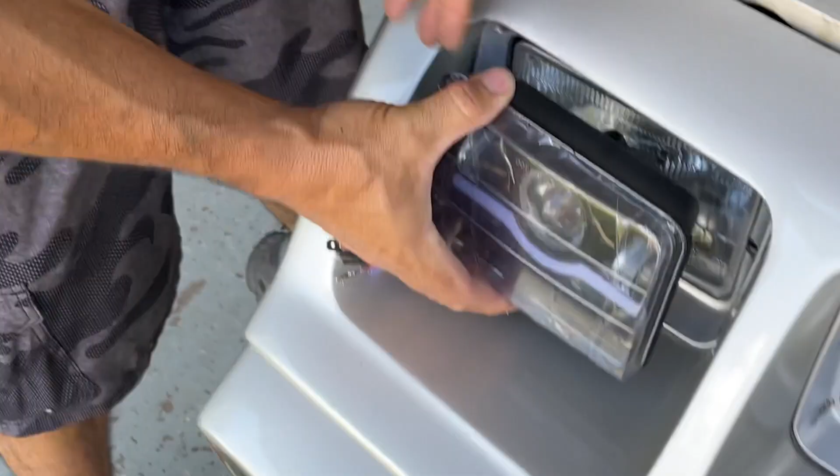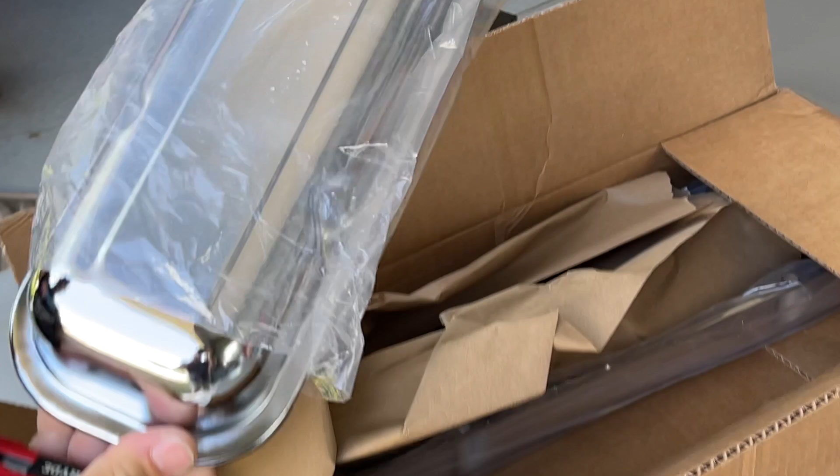What are these, Chris? Full LEDs with a running light and a blue accent. Valve covers. Were the lights on the list too? Yeah, nice. So these were center... center breather hole with center Pontiac bolt pattern.

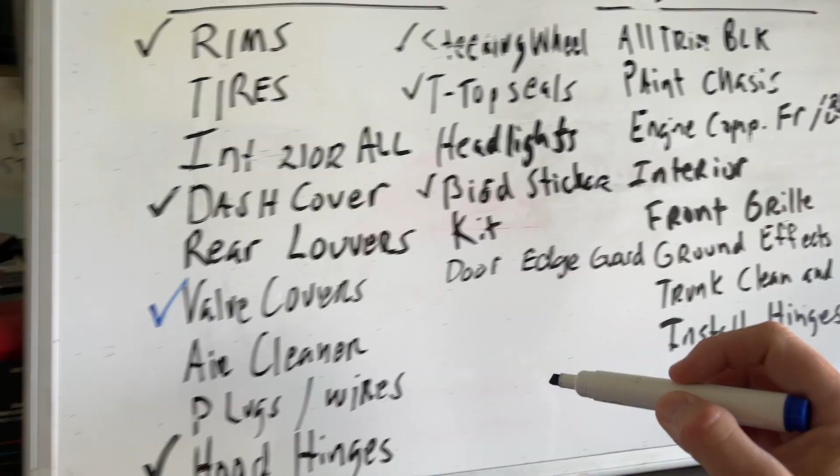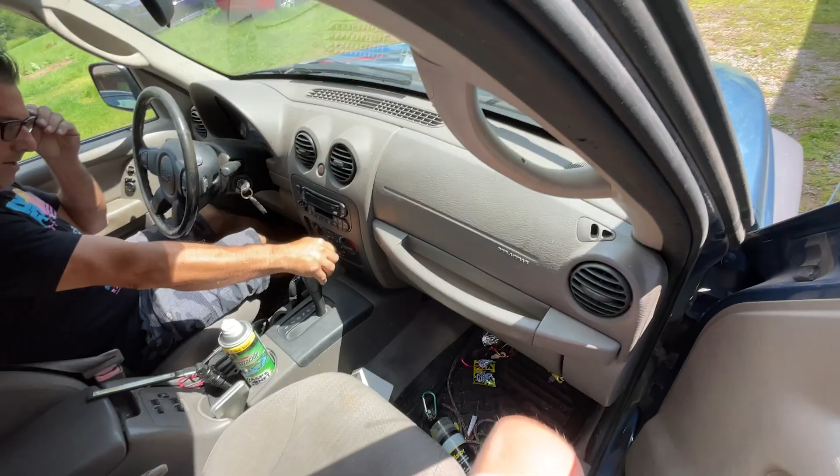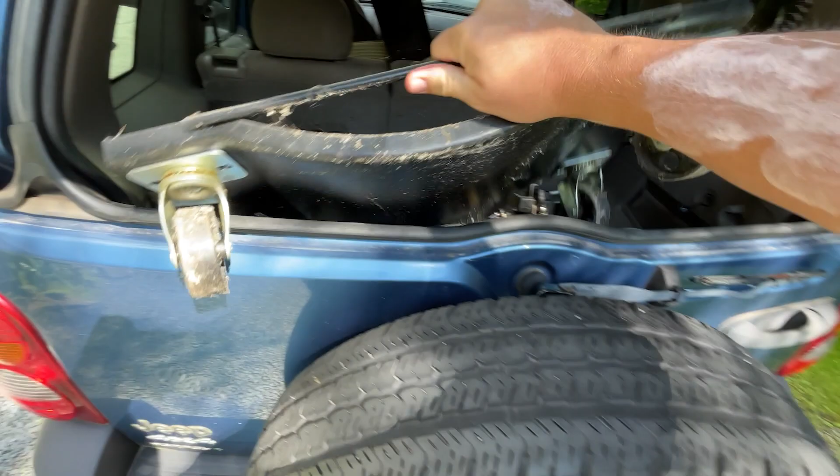When we were in Georgia, there was a lowrider Impala in front of us driving through town. It's hilarious, you knew where it was. It's underneath that, we got it. The other one we need is underneath a motor, so we have to get out of there.

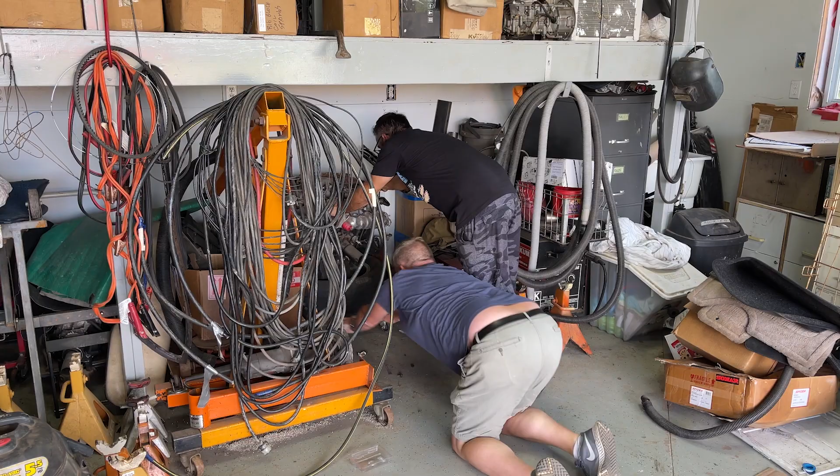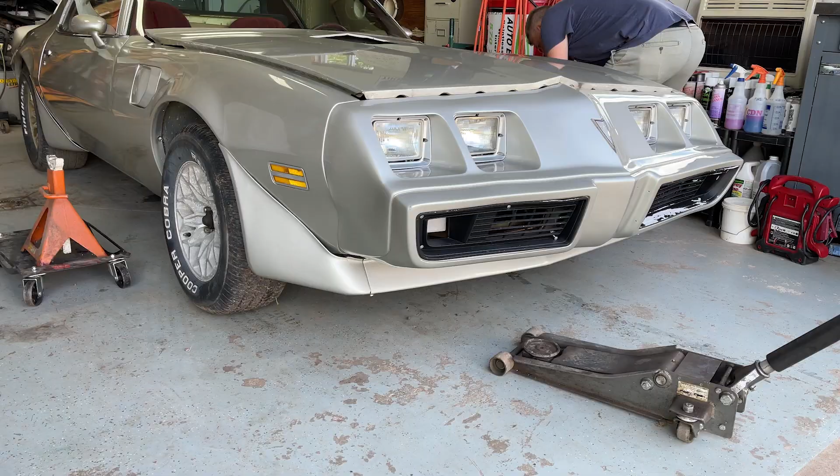They're made for going to the tires, but we can't have the tires in the way. We need to clean and paint inside the wheel wells.

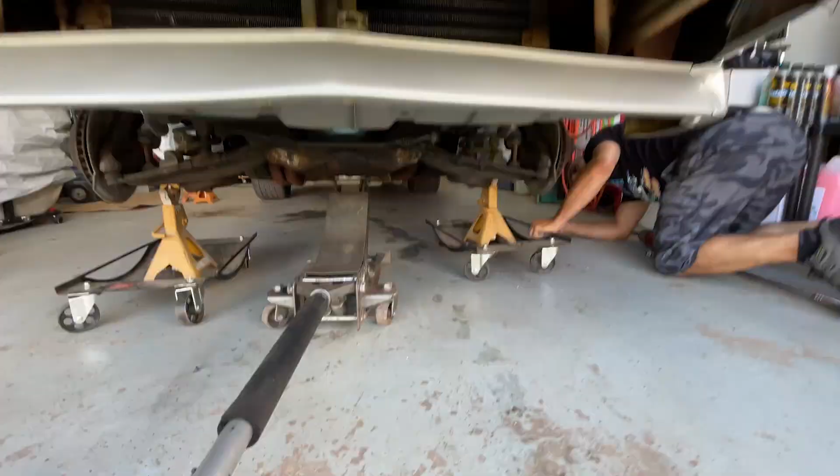One more, good. So I'm trying to keep them in that pocket. That way it makes it a little more steady. Open the door, yep.

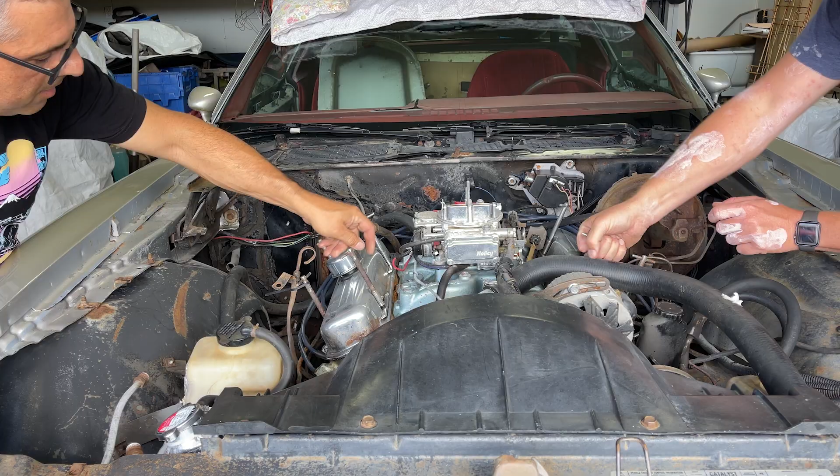I can see why they put something like this in here, though. I couldn't get any of mine to come out, so... this helps the valve cover seal better. Oh, you meant they didn't come with them. Yeah, it didn't come out. They're rotted.

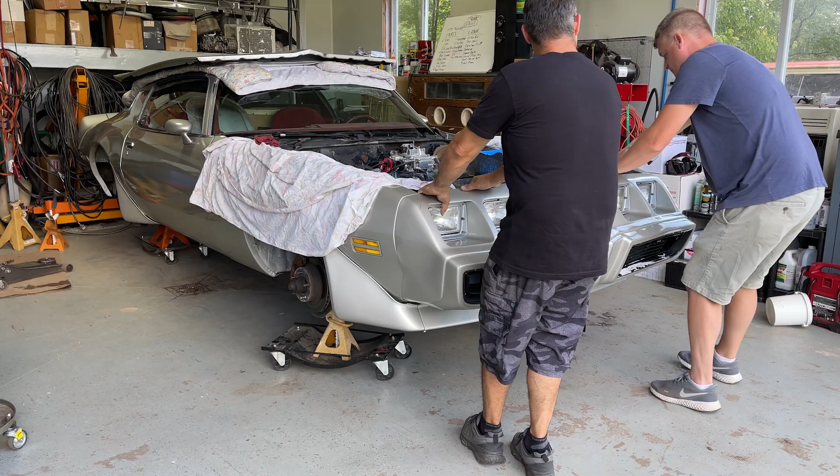Do this all the time.

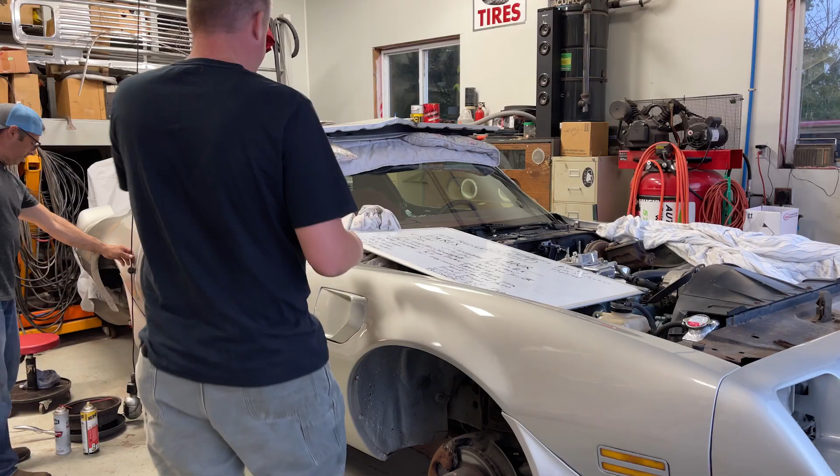Figure it out, Stan, hold this up. Or I'll hold this up. What? You could stand right in front of me if you want. Huh? Oh, right, I thought you were doing video. We're good. Right, we're professional YouTubers.

All right, here's a dry erase board list for the 79 Trans Am build. Now, like I said before in the first episode, we're just kind of making a cruiser, not necessarily low budget, but not super high budget either. So what we're gonna do is we're gonna do everything we can ourselves, and we're gonna make a nice running car that's definitely gonna be cool enough to drive to a car show or a Friday night cruise, something like that. We have our parts list, we have our labor list.

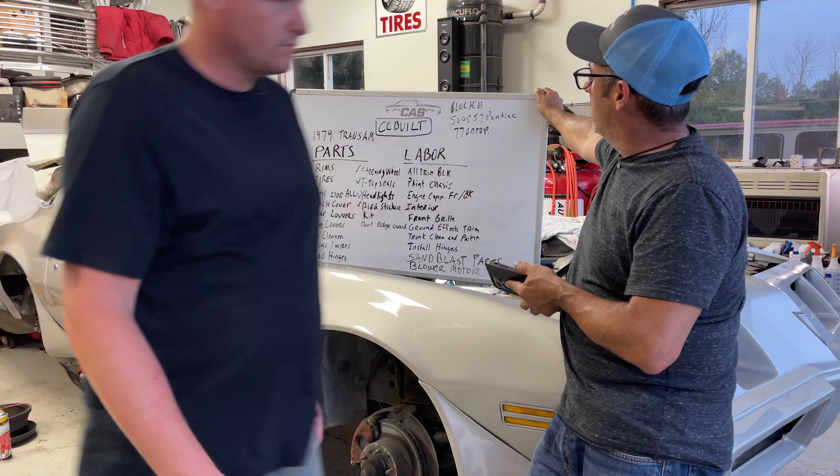They kind of go together, but I like to get a lot more parts ready to go before we necessarily do a lot of the labor. So we checked off a lot of the parts already on the parts list. We have the rims, we don't have the tires yet, but we don't really need the tires yet. A lot of the little stuff to do the engine compartment we have.

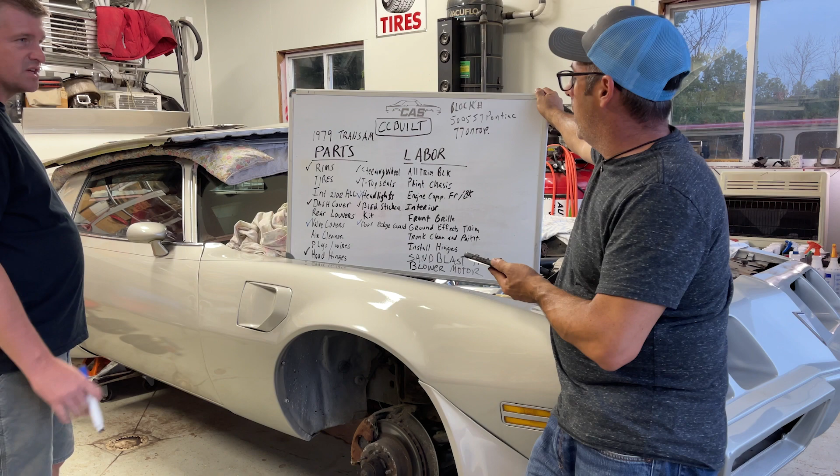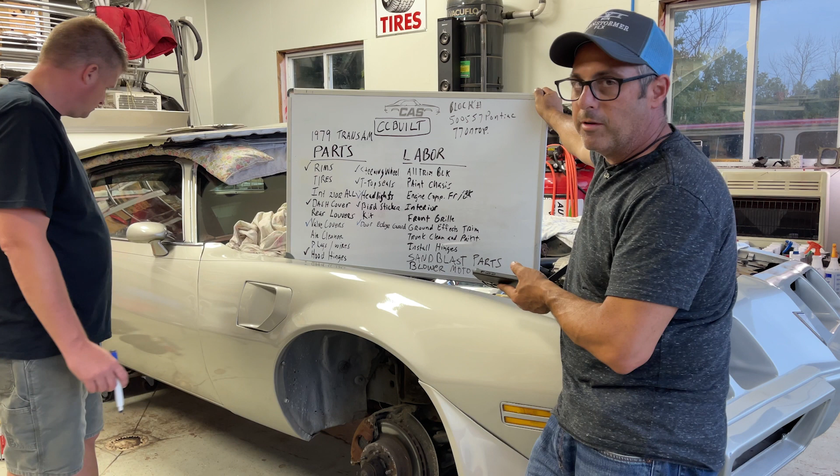We're gonna go for it, it's gonna have the Firebird stickers, it's gonna have all the... it's gonna look like the 79 Firebird, but those of you who know what Resto Mod is, it's gonna definitely be a Resto Mod look. It's gonna have a lower stance, little bigger wheels, still in the Firebird fashion. We have the 17-inch year one wheels, which look like the original Firebird wheels, but they're bigger. Lower profile tire, way more modern, better handling. The look is just incredible compared to what they used to look like.

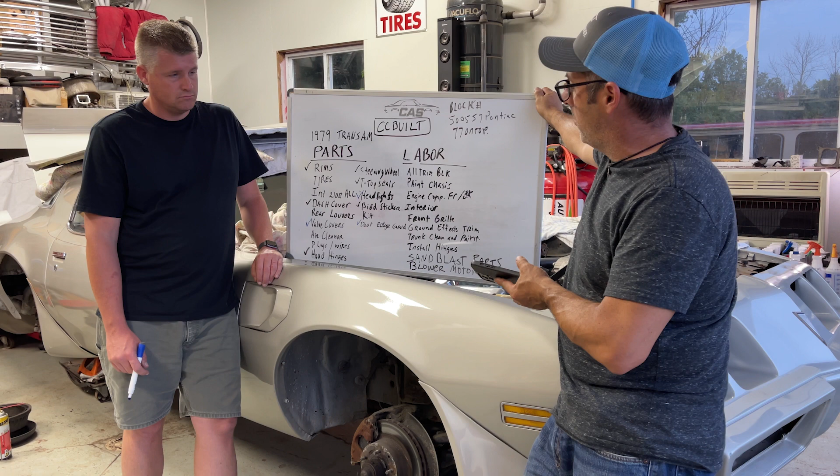It's gonna have the normal Firebird kit on it, but we're definitely gonna make it a one-off. It will be its own design. The rest of the graphics and the body will definitely be its own design. So you won't be parking next to one just like it at the show, because there won't ever be another one like it. You were taking apart all the brakes in the back.

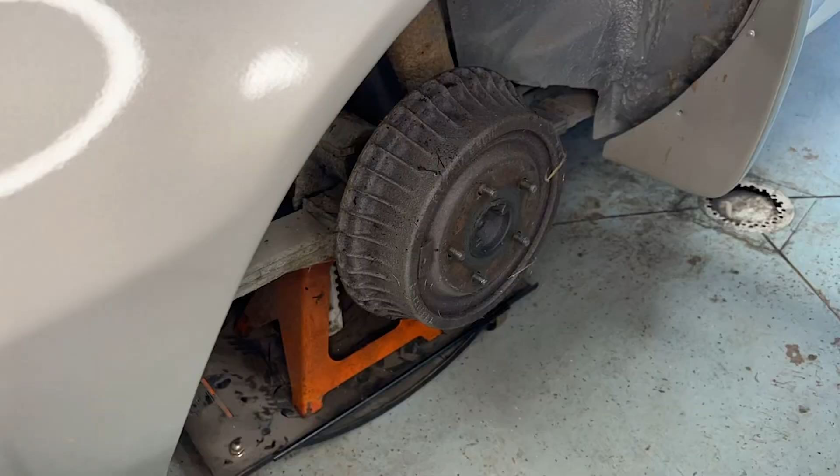Yeah, we have one side we have to rebuild, had a bad cylinder which let brake fluid into the rear drum, wet down everything. So clean all that up, get the new brake cylinder in there. Have new brake pads on the front, they're on already. So we'll just make sure the brakes are all good. That way, once we get it all sanded in the wheel wells, get the frame all touched up really nice, we can put the tires on, and we don't have to take it apart again.

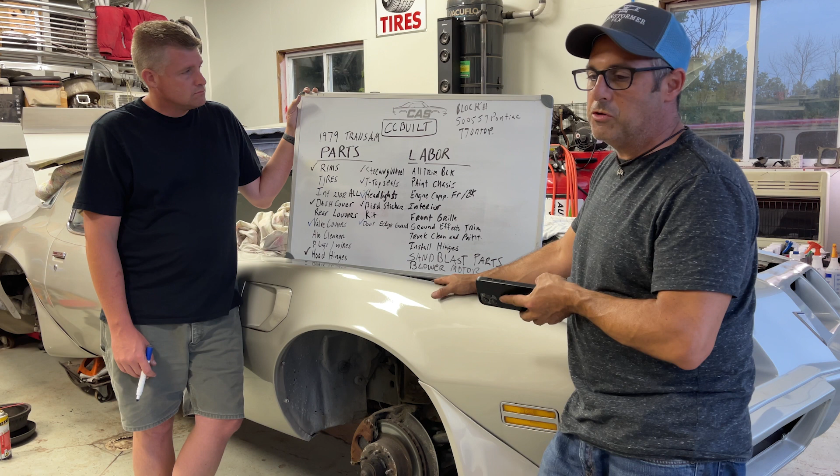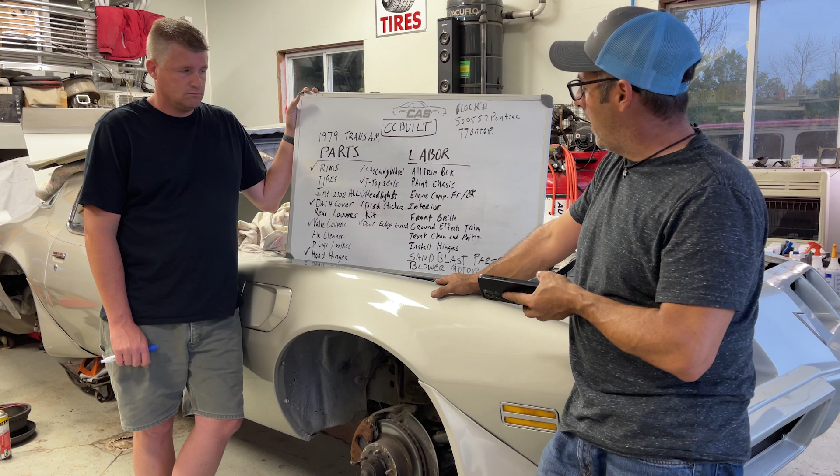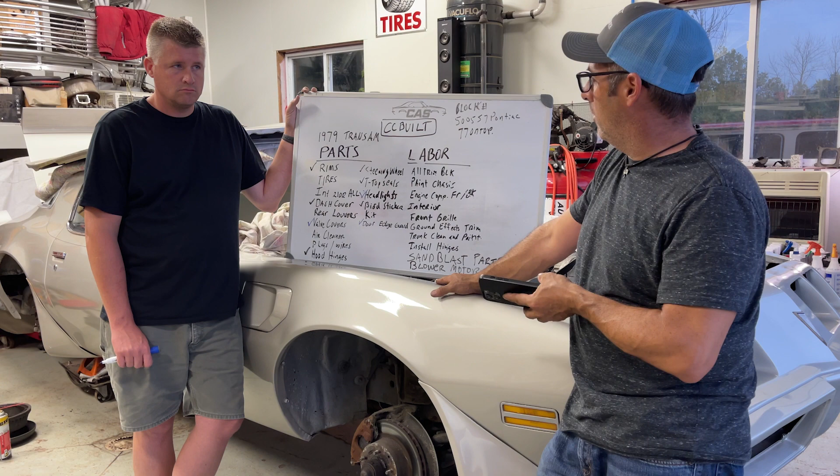Another cool thing we're doing with this is a lot of the modern cars now you could order, they call them blackout editions, no chrome, all black. So we are doing all the chrome and all the polished trim on this, it will be sanded and done in a semi-gloss black to kind of imitate what they do now on the newer vehicles. It'll tie in a lot of the designs that we have too, as far as going with the black. The rims will not be black, but that will be the only thing that will be really different from a blacked out edition that you know of.